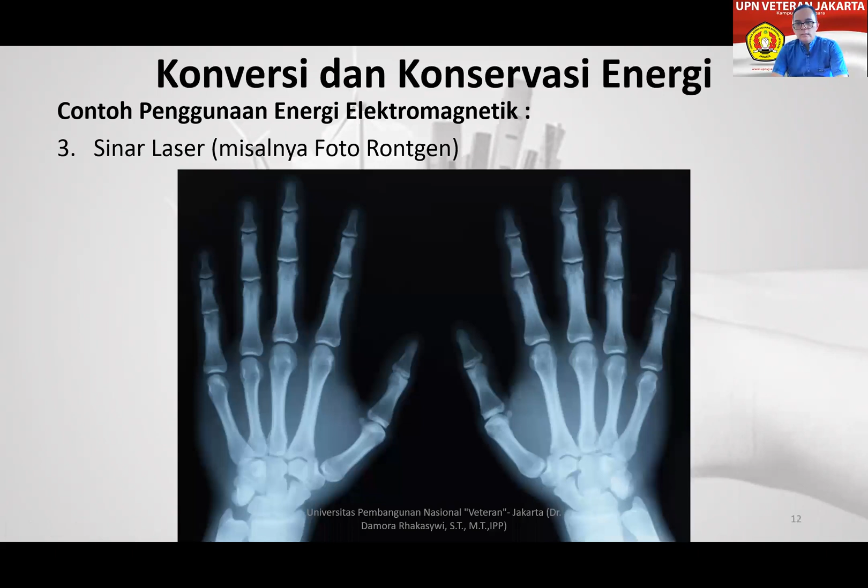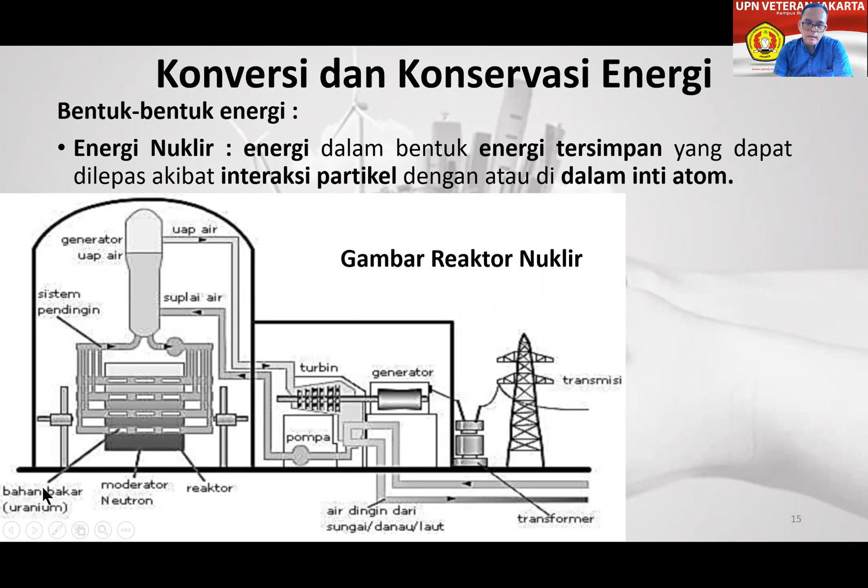Oke, jadi tadi yang sudah terakhir di bagian Rontgen, kemudian untuk infrared ini juga merupakan energi yang bisa dimanfaatkan untuk mentransfer data atau memberikan input tertentu kepada objek yang ingin diperintahkan. Lalu bentuk energi yang lain ada energi kimia, kemudian nuklir. Energi reaksi nuklir atau energi nuklir ini dalam bentuk energi yang tersimpan di bahan uranium atau bahan kimia, unsur kimia, dan di bagian akhir ialah tujuannya mengkonversikan energi awalnya dari bahan uranium berubah menjadi energi listrik.

Lalu bagaimana uranium tersebut didapatkan, prosesnya secara sederhana atau mudahnya memperoleh dari uranium tersebut. Untuk memperolehnya, pertama diawali dulu ada penambangan, tambang uranium mine, lalu dilakukan konversi, pembersihan, enriching conversion ke bahan bakar, to fuel. Setelah uranium tersebut dikonversikan untuk menjadi bahan bakar, bisa dipergunakan ke dalam yang tadi untuk sebagai reaktor.

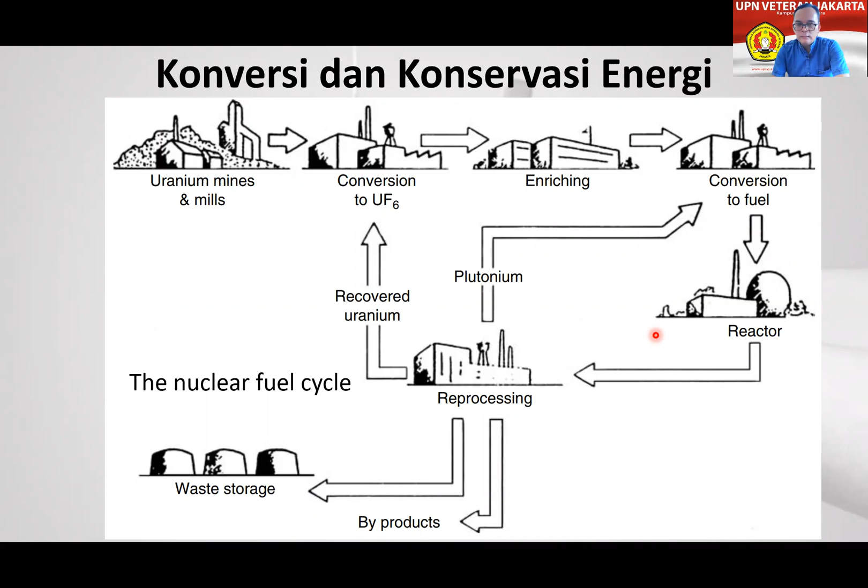Untuk reaktor di bagian ini dipergunakan sebagai penghasil panas atau menghasilkan uap panas. Nah, ini adalah tahapannya.

Lalu nuklir reaktor, reaksi nuklir, bagaimana cara memahami reaksi nuklir tersebut secara fisikal atau fenomena fisiknya. Di bagian ini untuk tampilan share screen, nanti kan saya coba ulang kembali menampilkan di layar bagaimana reaksi dari nuklir tersebut ketika dia melakukan reaktor. Untuk tampilan di layarnya sudah masuk di share screen.

Ya, untuk tampilannya sudah masuk di layar. Sudah, Pak. Oke. Kemudian seperti apa proses dari reaktor nuklir tersebut bisa menghasilkan di bagian akhir, di sini ada generator, generator yang berfungsi untuk menghasilkan listrik tersebut.

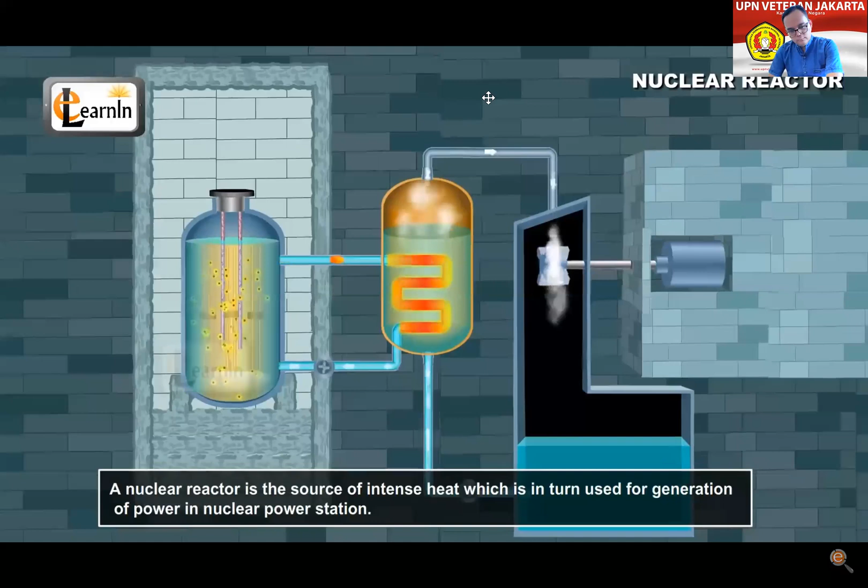Nuclear reactor. In this video, we're going to learn about the nuclear reactor. Nuclear reactors are the modern-day devices extensively used for power generation, as the traditional fossil fuels, like coal, are at the brink of extinction. A nuclear reactor is the source of intense heat, which is in turn used for generation of power in nuclear power stations. Its mechanism is similar to that of a furnace in a steam generator. The steam is used to drive the turbines of the electric generator system.

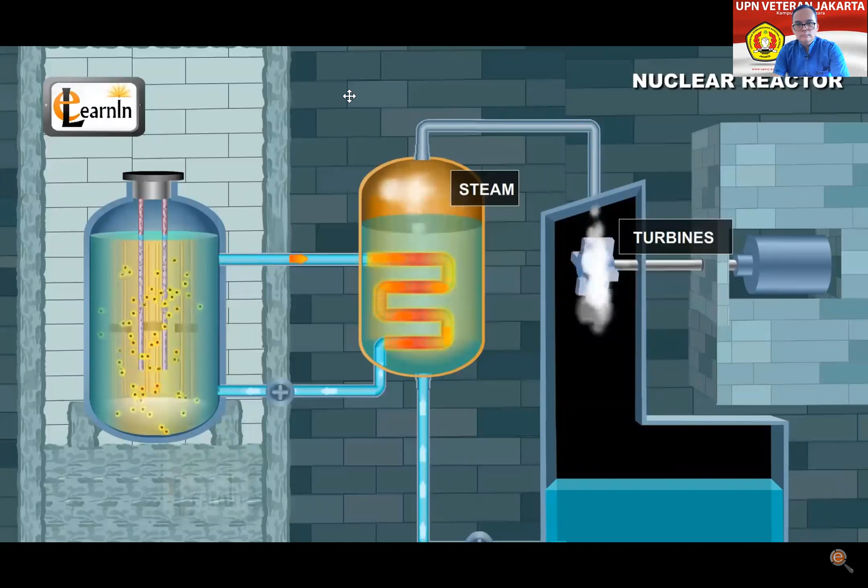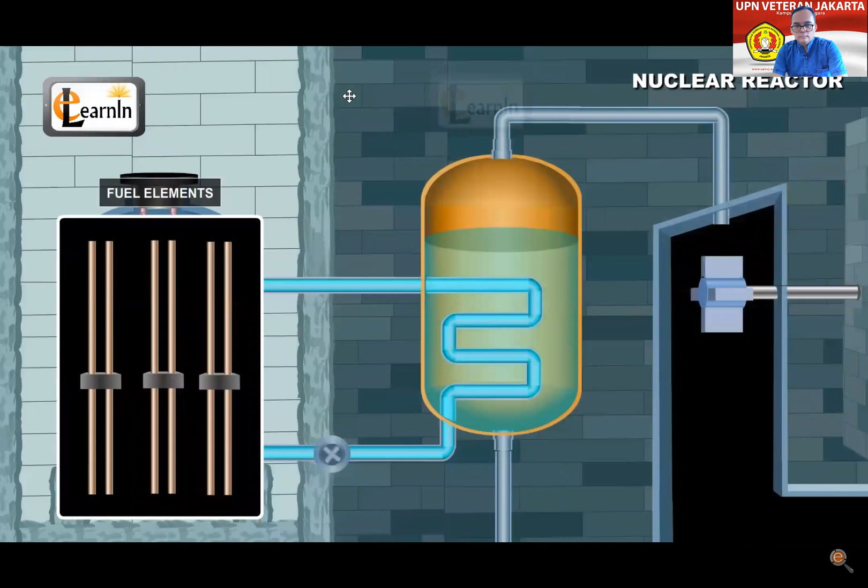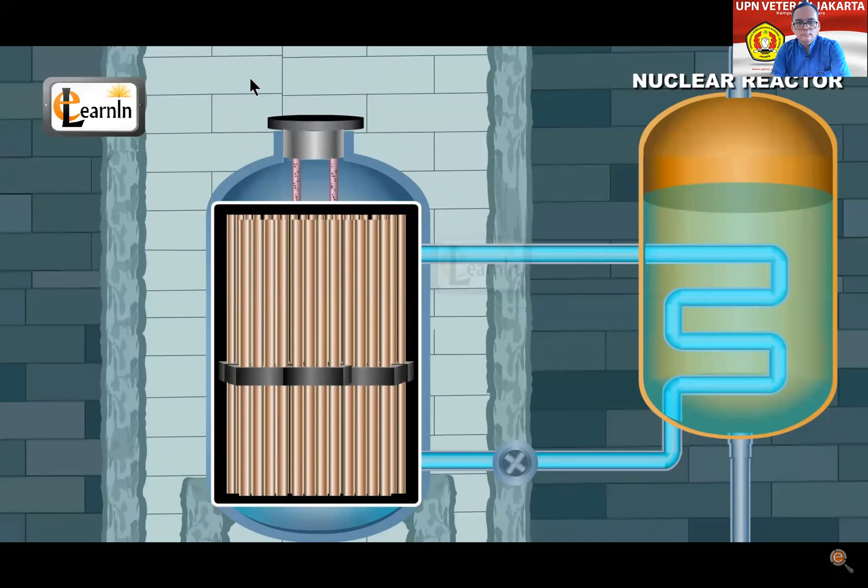A nuclear reactor consists of three crucial components: fuel elements, moderator, and control rods. Fuel elements come usually in the shape of thin rods of about 1 centimeter in diameter and contain fissionable nuclei like uranium-235 or uranium-238. These rods vary in number according to the size of the reactor. In large power reactors, thousands of fuel elements are placed close to each other. This region where these fuel elements are placed is called the reactor core.

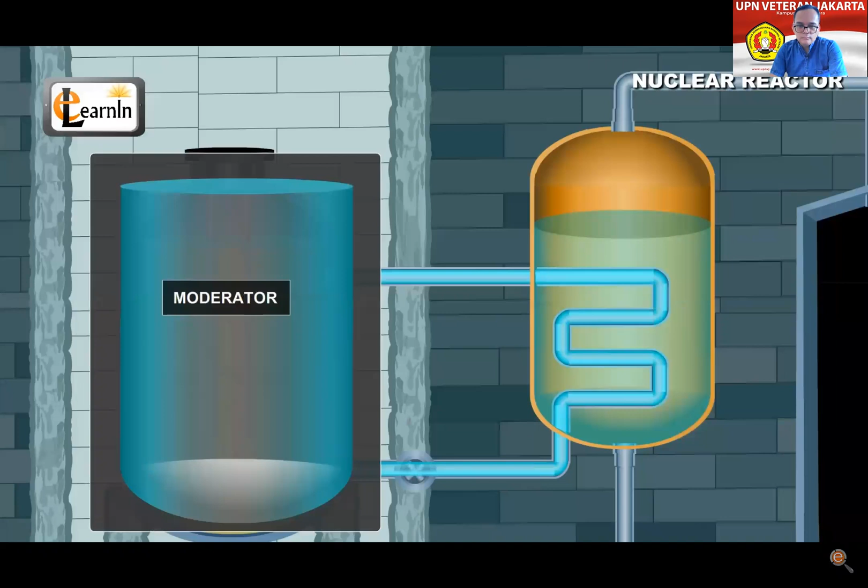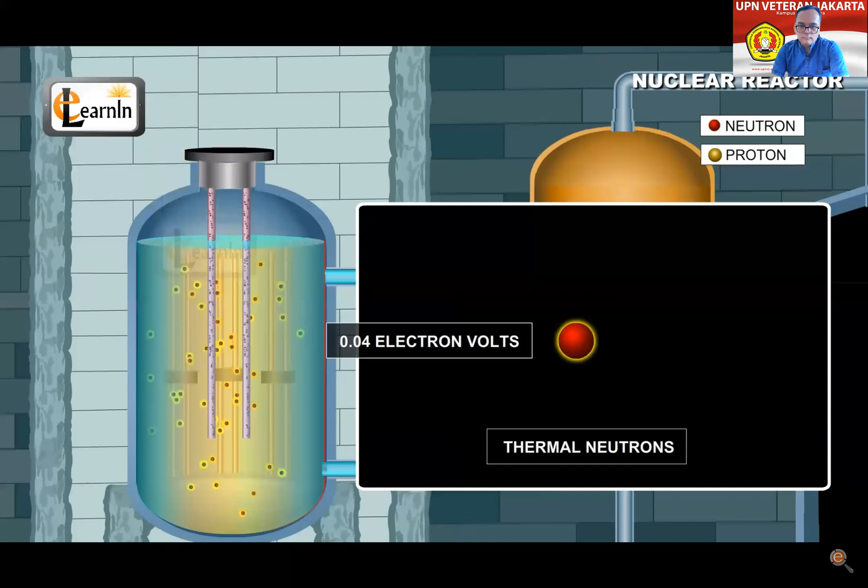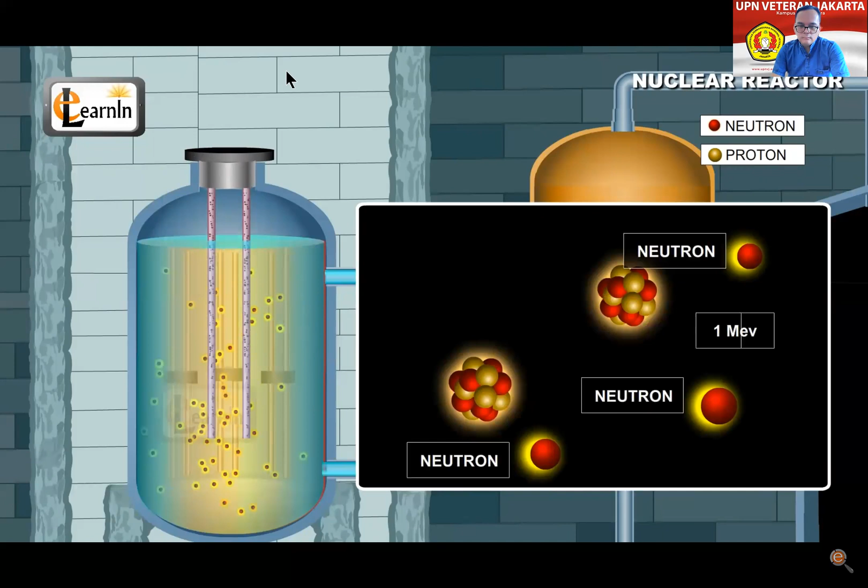These fuel elements are normally immersed in water, which acts as a moderator. The objective of a moderator is to slow down the high-energy neutrons in a nuclear reactor, which are produced during the nuclear fission process by the fuel elements. Thermal neutrons, which are the neutrons with energy of about 0.04 electron volts, are capable of producing fission reaction with uranium-235. During the fission reaction process, new neutrons are given out, which have energies of about 1 MeV, this is 1 mega electron volts.

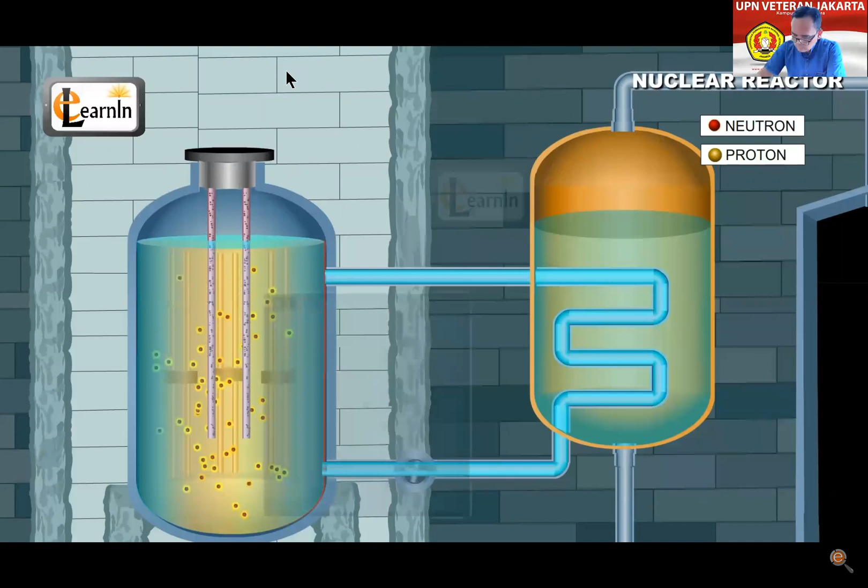These neutrons typically escape from participating in another fission process, as they are accompanied by enormous energy release. In fact, the probability of these neutrons produce another fission reaction is 500 times less than that compared to a thermal neutron. This is where a moderator is extremely useful. Moderators have the capability to slow down, or in other words, moderate, the speeds of these high-energy neutrons so that they can in turn be used for a chain reaction to trigger multiple fission reactions of other uranium-235 nuclei.

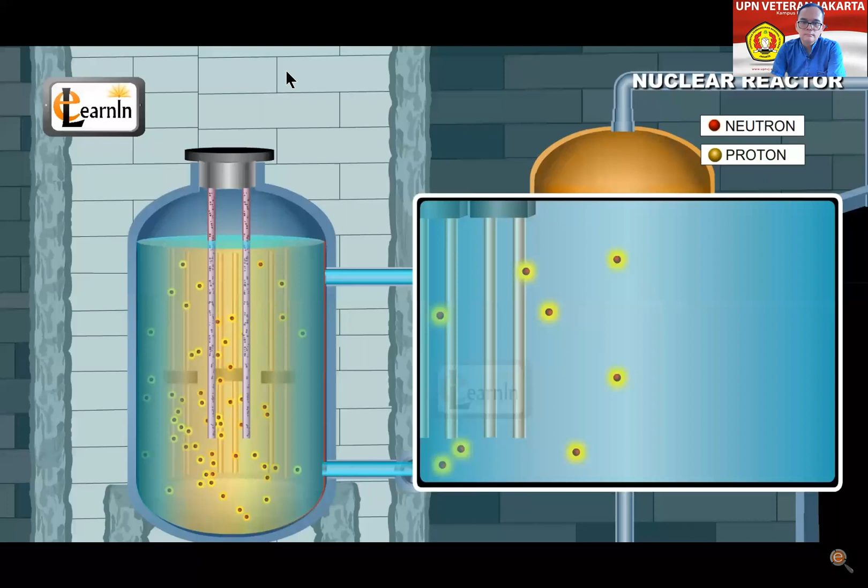Commonly, ordinary or heavy water is used as a moderator in nuclear reactors because of the deuterons present in them, which are capable of slowing down the neutron's speed. Water molecules in the moderator are useful in slowing down the high-energy neutrons, which leave the fuel element after nuclear fission. These high-energy neutrons collide with water molecules, thereby losing out on some energy with every collision and therefore slowing down substantially. A new fission reaction can now be triggered using this slow neutron by striking it with a fuel element. The third and most prominent part of a nuclear reactor are the control rods.

In order to get a steady output of energy from the nuclear reactor, every single fission reaction should trigger another fission reaction and ensure the availability of spare neutrons released to trigger the chain reactions. By controlling the number of spare neutrons available at any given time, the rate of nuclear fission chain reactions can be controlled. This control on the fission reaction can be maintained using control rods.

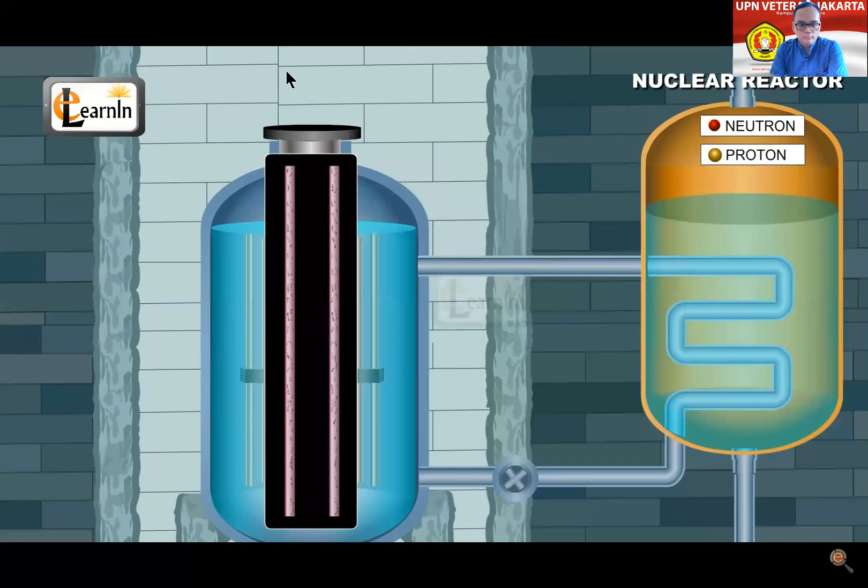The main function of the control rods is to absorb any excess or spare neutron in the moderator in order to prevent any further fission reactions. Usually, such control rods are made of boron or cadmium. To increase the rate of fission reactions, these rods can be removed from the moderator. A steady output of energy can thus be maintained by inserting or removing the control rods in the nuclear reactor.

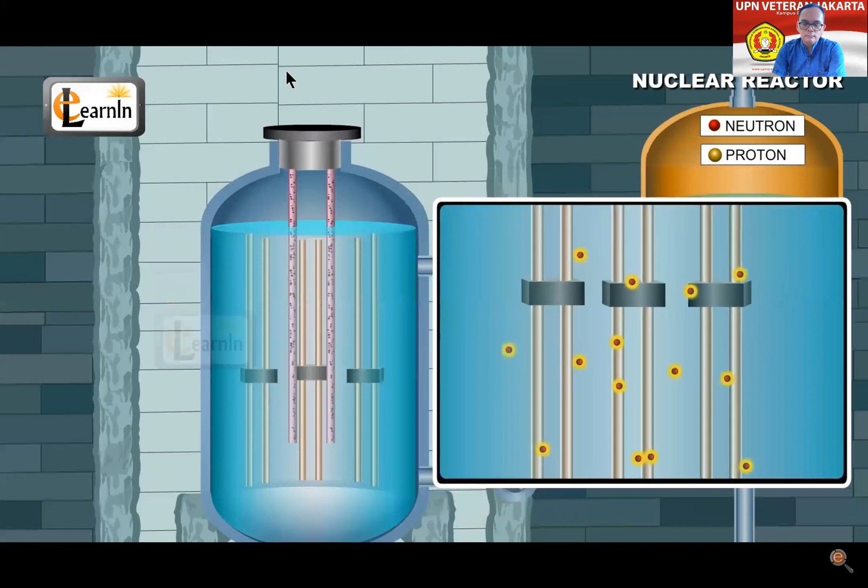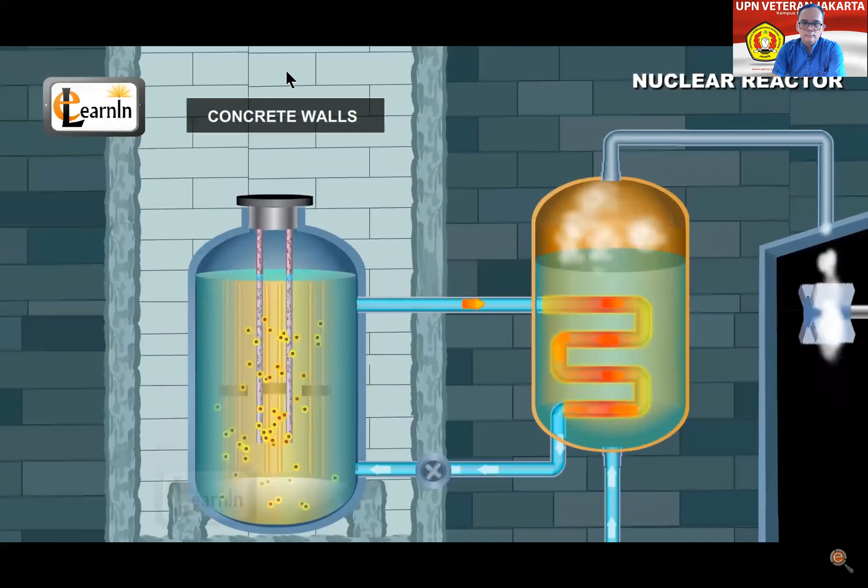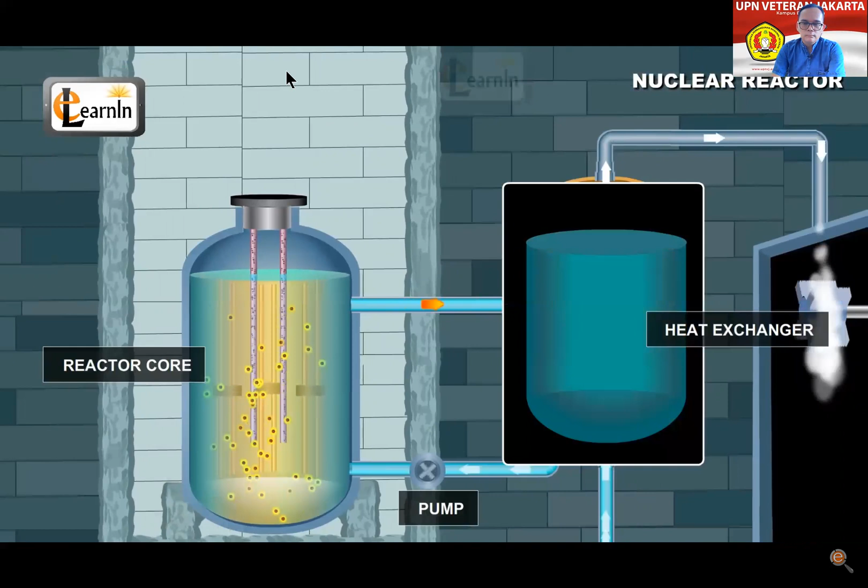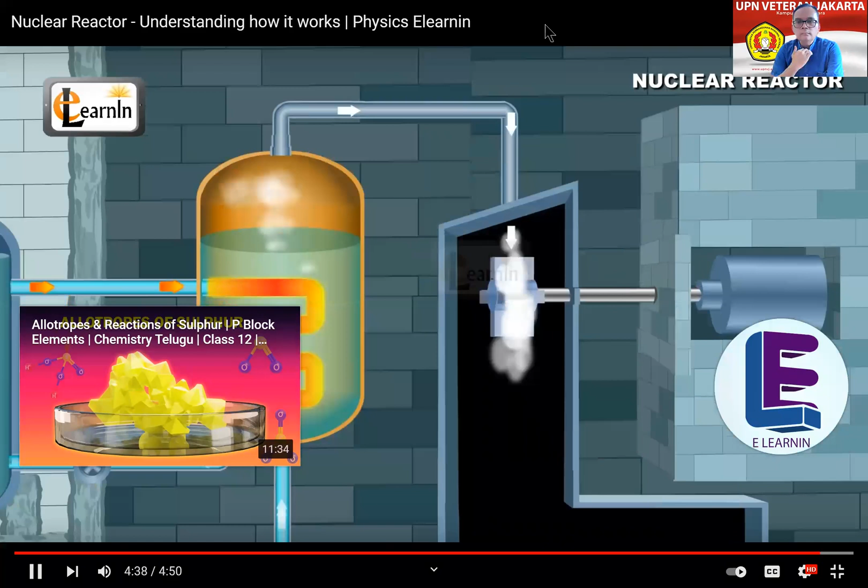and changes to steam, which is in turn used to turn the turbines. So huge heat energy gets converted into electrical energy. Water is continuously flown in and out of the nuclear reactor using the pump. So a nuclear reactor successfully generates nuclear energy from fission reactions.

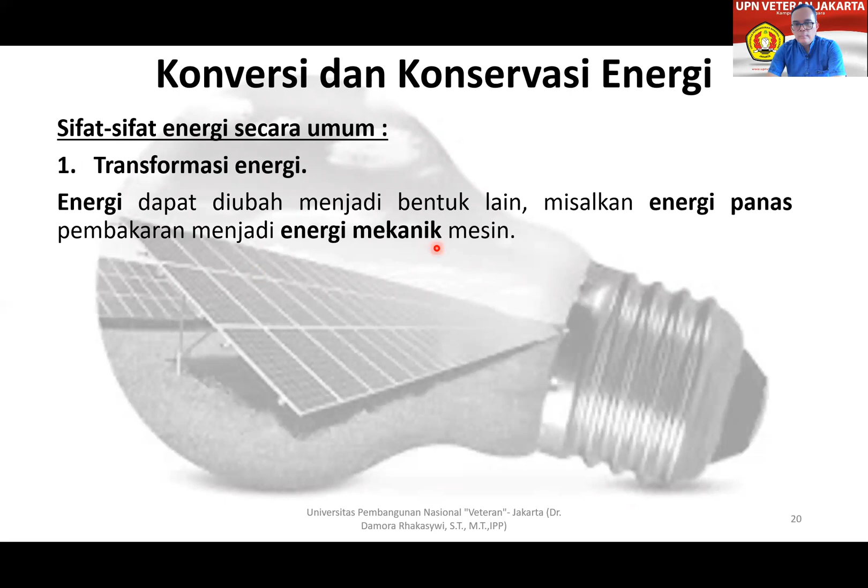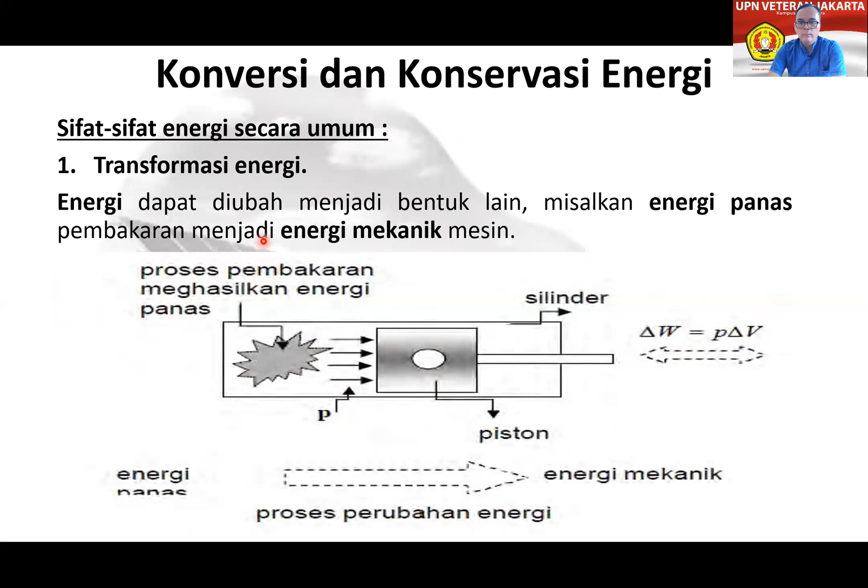Ilustrasinya yang terjadi adalah pada proses motor pembakaran dalam atau biasa dikenal dengan ICE, internal combustion engine. Pada bagian ini ada pengubahan energi yang terjadi, yang awalnya diawali dari bahan bakar yang dimasukkan ke chamber room, ruang bakar, lalu dipanaskan sehingga menghasilkan proses combustion, proses pembakaran. Proses pembakaran ini meningkatkan nilai temperatur, nilai suhu yang ada di ruang tersebut. Dengan meningkatnya nilai temperatur, suhu juga memberikan pengaruh terhadap kenaikan nilai P, nilai tekanan. Tekanan inilah yang dipergunakan atau kemampuan dari high pressure tersebut untuk memberikan gaya dorong terhadap piston yang dipasang. Gerakan gaya dorong inilah yang memberikan usaha atau W, delta W working, sehingga menghasilkan energi mekanik. Itu adalah gambarannya proses transformasi energi.

Kemudian di bagian sampai sini ada yang ingin ditanyakan atau ada yang ingin didiskusikan?

Untuk suaranya bisa masuk, jelas terdengar. Terdengar, Pak. Ya, oke. Kemudian saya akan coba masuk lagi ke slide yang tadi.

Jadi di bagian ini ada proses pengubahan energi yang digunakan, memanfaatkan energi panas berguna untuk menggerakkan sistem tertentu.

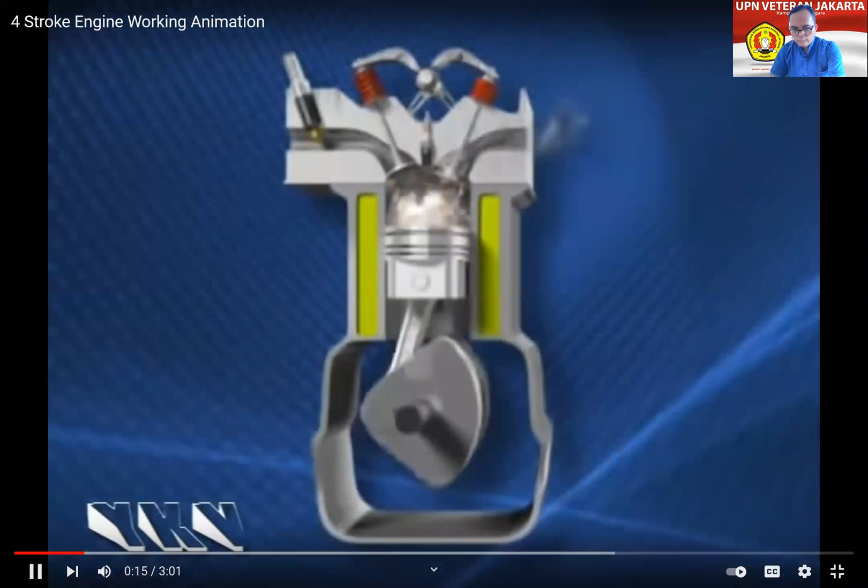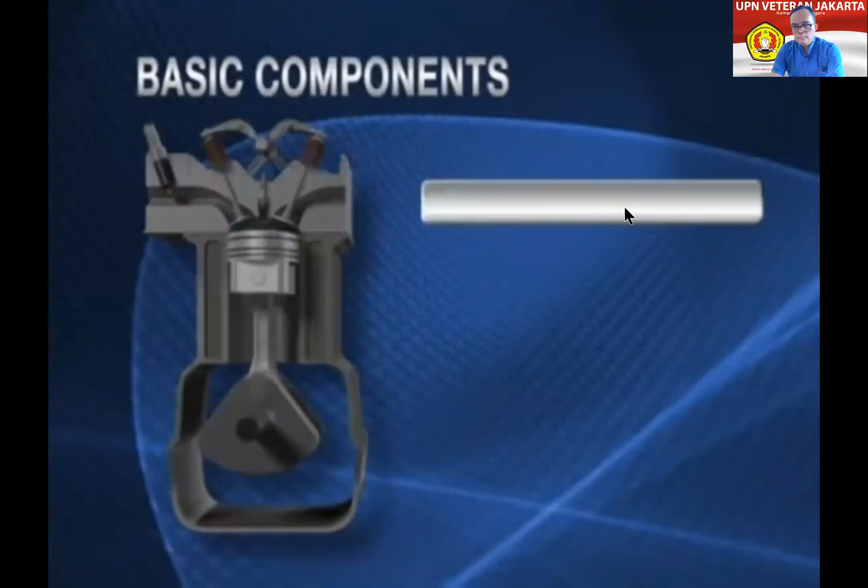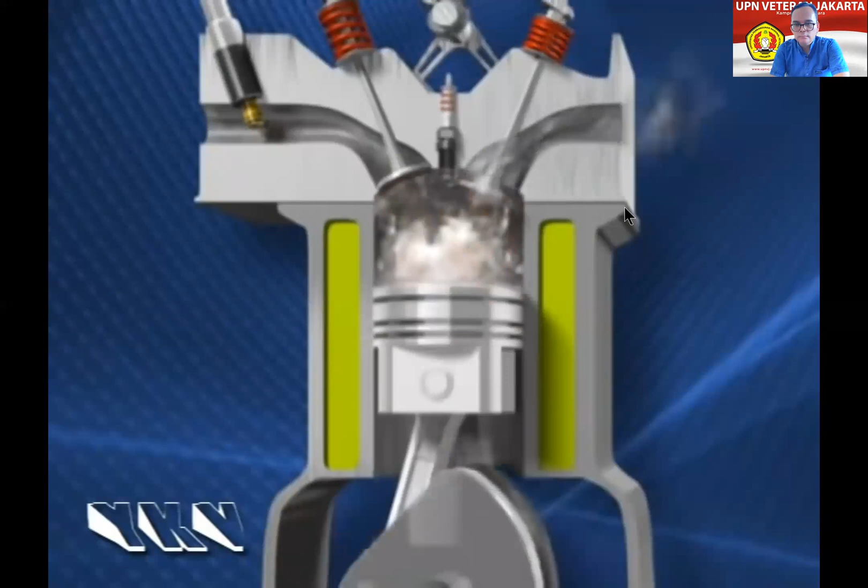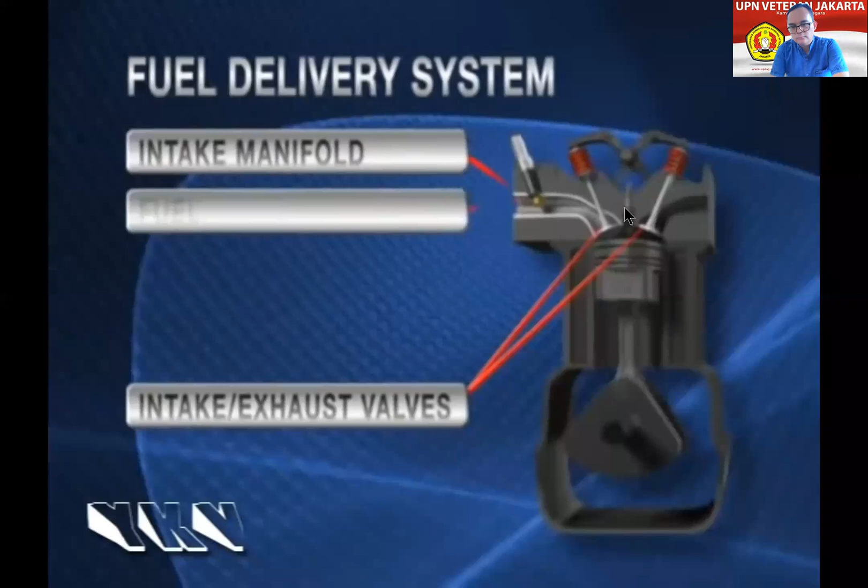A basic lesson in the fundamentals of a 4-stroke EFI gas engine may be helpful to your understanding of Mercury products. Here are the basic components of every 4-stroke gas engine: a piston, a connecting rod, a crankshaft. As the piston travels up and down in the cylinder, this linear motion is turned into a rotating motion at the crankshaft. The longer the stroke of the piston, the larger the displacement of gas and air occurs in the cylinder. To propel that piston, we need to ignite a tiny bit of gas and a whole lot of air. This creates expansion inside the cylinder. The fuel delivery system consists of an air intake manifold, valves, intake and exhaust, a fuel injector, and a spark plug. A 4-stroke engine is called a 4-stroke because 4 up and down motions are needed to complete the cycle.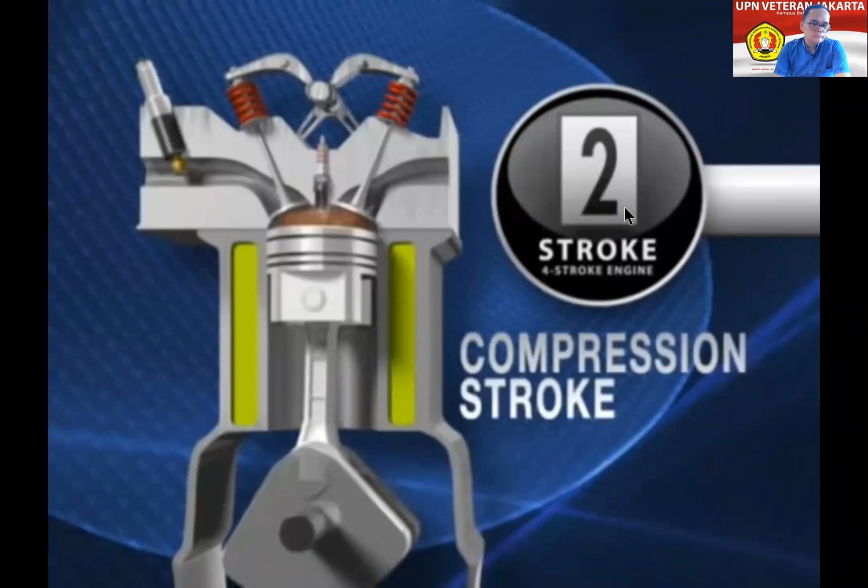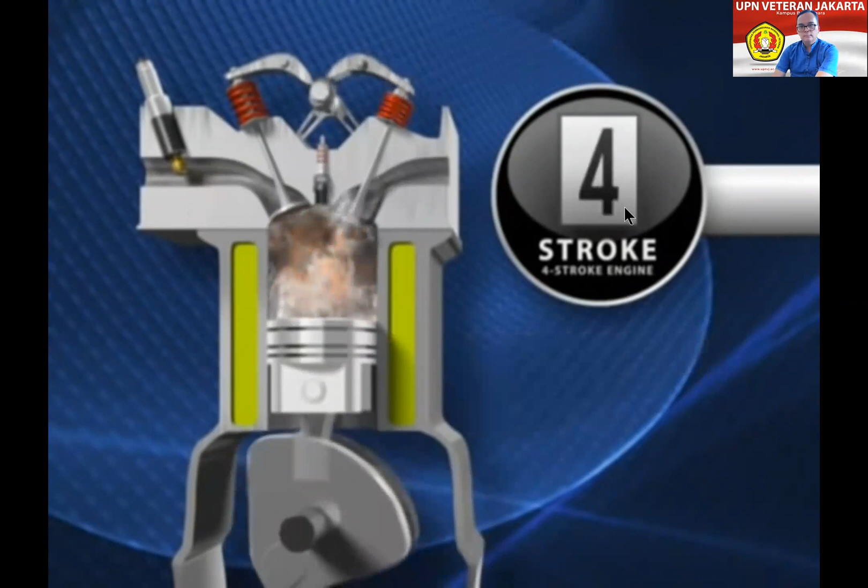In the first stroke, the piston travels downward as the intake valve opens and a mixture of air from the atmosphere and a metered amount of gas from the electronic fuel injector enter the cylinder. This is called the intake stroke. On the second stroke, the piston travels upward, compressing the air and fuel to make a highly combustible mixture. This is called the compression stroke. At this point, the spark plug fires, sending the piston downward from the expansion of the air and gas mixture. This is the combustion stroke. The fourth stroke is the exhaust stroke. As the piston travels upward, the exhaust valve opens to release the burned air-fuel mixture. When the piston reaches the top of this stroke, the intake valve opens and the cycle begins all over again.

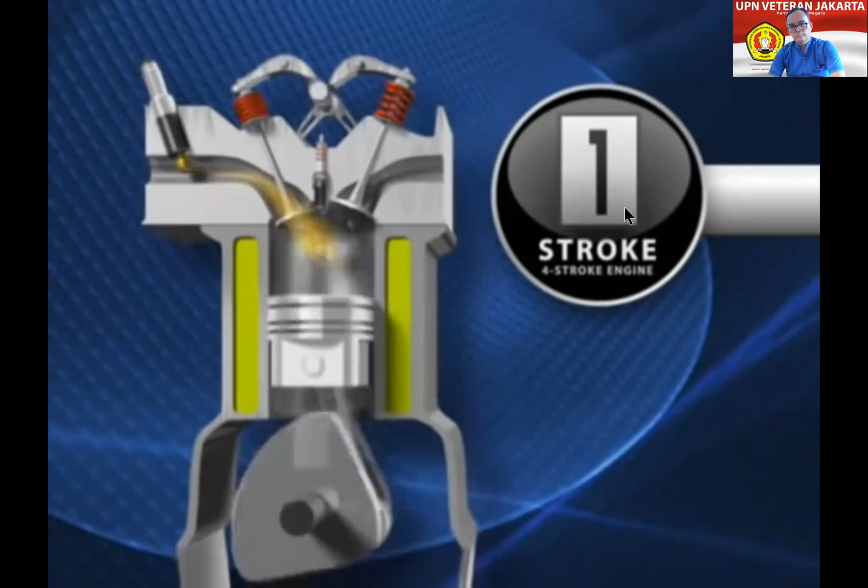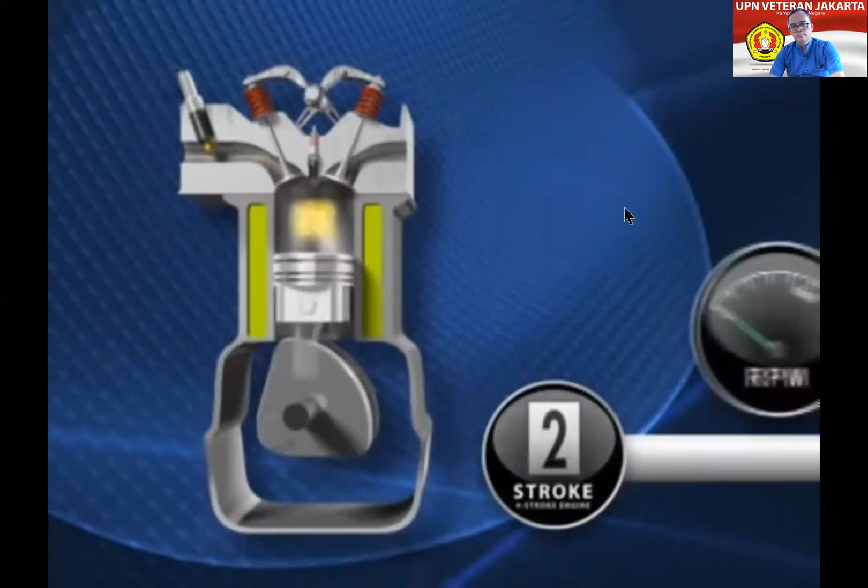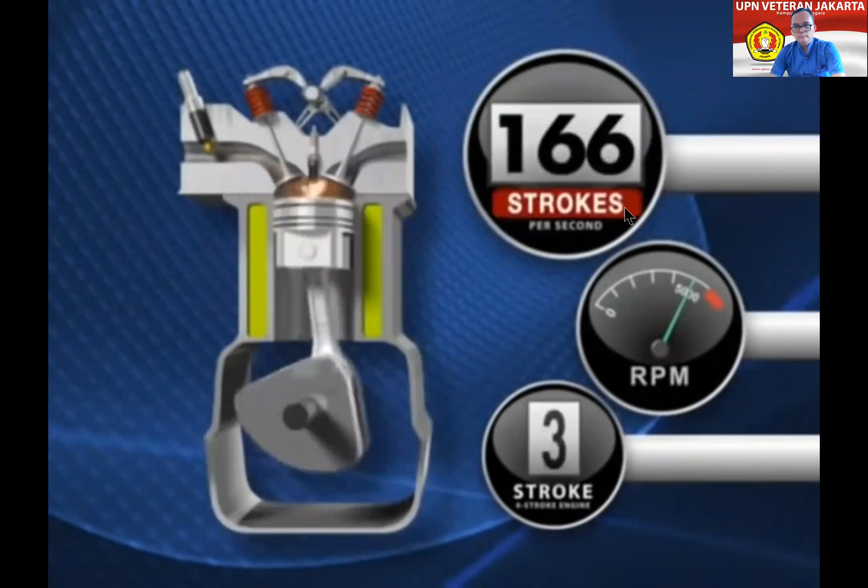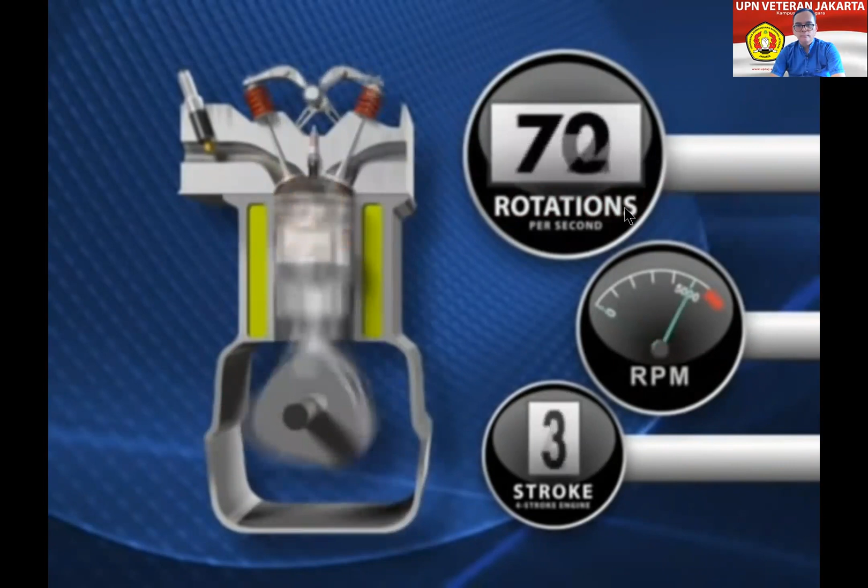It takes 1 up and down motion, or 2 strokes of the piston, to create 1 revolution of the crankshaft. RPMs, or revolutions per minute, is how many times the crankshaft rotates within that minute. At wide open throttle, the crankshaft may turn at 5,000 RPMs, or a dizzyingly 83 times per second. Meanwhile, the piston traveled up and down 166 times in that same second. Want to see how fast that is? Now, that's fast. Let's see it again. Amazingly, the four-stroke EFI engine does this smoothly, quietly, and reliably for years and years of operation.

Itu adalah gambaran proses pengubahan energi yang dilakukan, yang awalnya bahan bakar masuk ke ruang bakar atau combustion chamber. Di bagian tersebut terjadi proses pembakaran sehingga meningkatkan temperatur, mengalami kenaikan, dihasilkan juga kenaikan tekanan meningkat, pressure meningkat, mampu memberikan dorongan terhadap piston atau bagian yang dipasang tersebut.

Oke, baik, sampai sini ada pertanyaan?